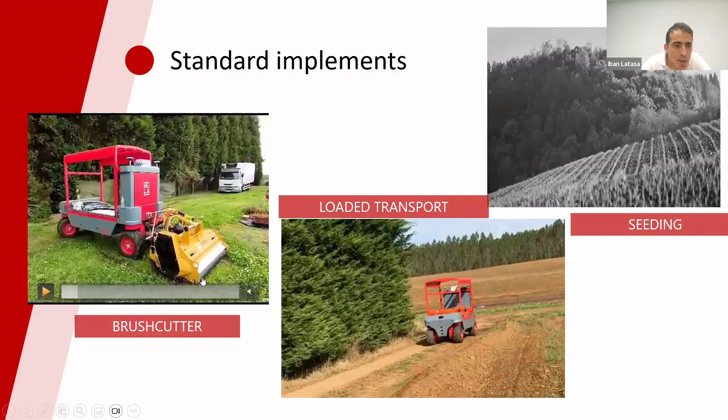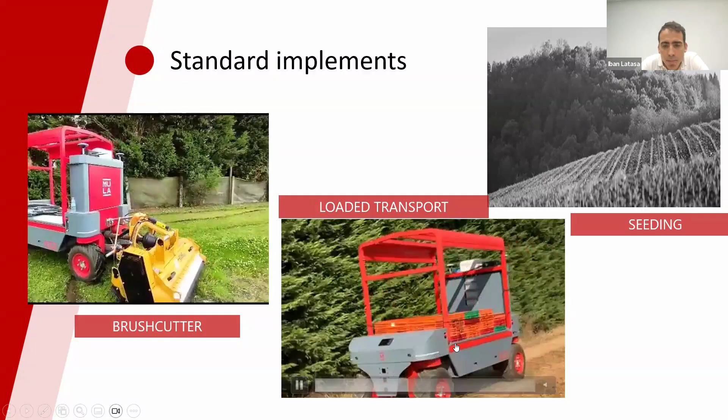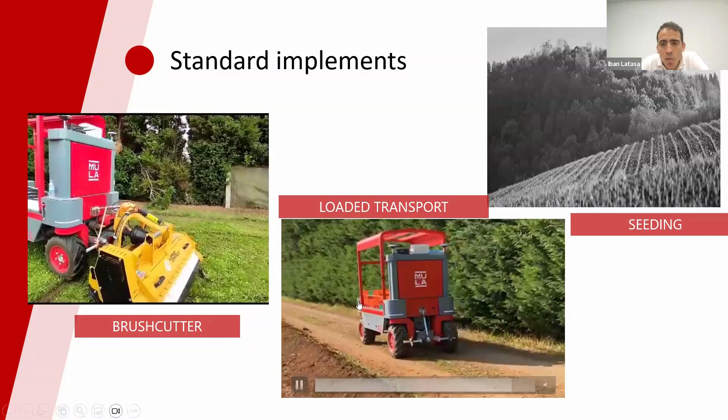It also has a weight system, so you can transport and weigh the results, and monitor anywhere how many kilos MULA has inside. We have also tested it for seed applications.

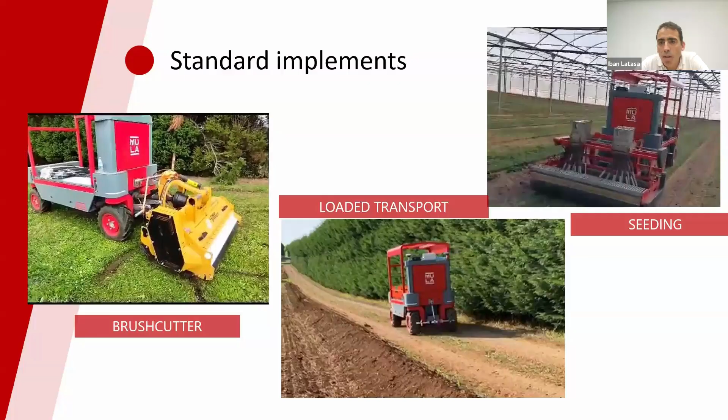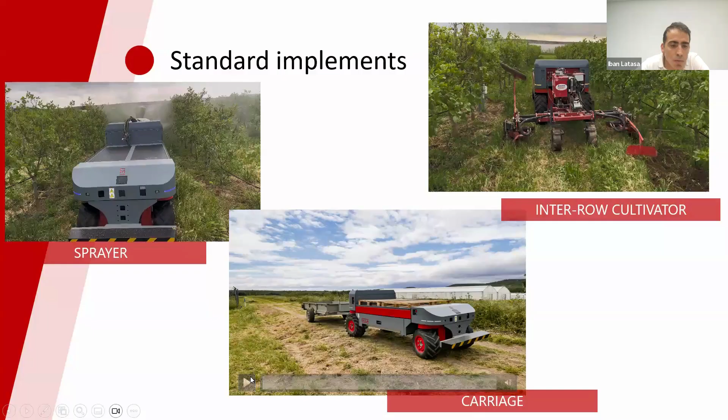Not only outdoors, but also in a greenhouse, and another implement with a sprayer. It goes autonomously, also supporting any work, everywhere in the farm.

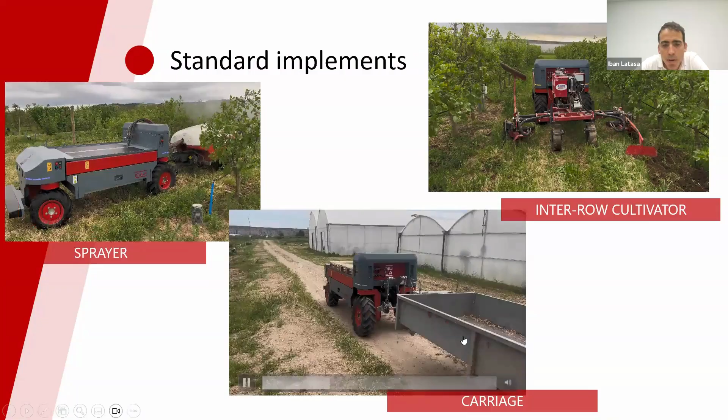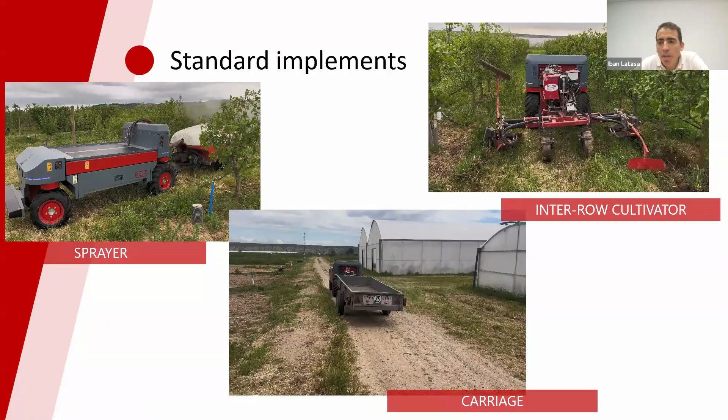So these are standard implements that farmers could already have on their farm, and we can connect them to the MULA.

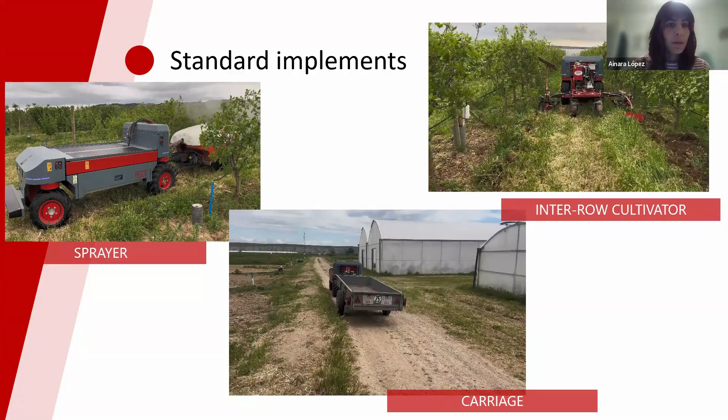Iban, we are experiencing some trouble with the sound. Yeah, I think the sound has finished. Okay, yes, can you hear me now?

Yes, perfect. So as I told before, you can connect any implement that any farmer has. These are smaller implements, not for bigger tractors, but then we will see the dimensions of the MULA and its power.

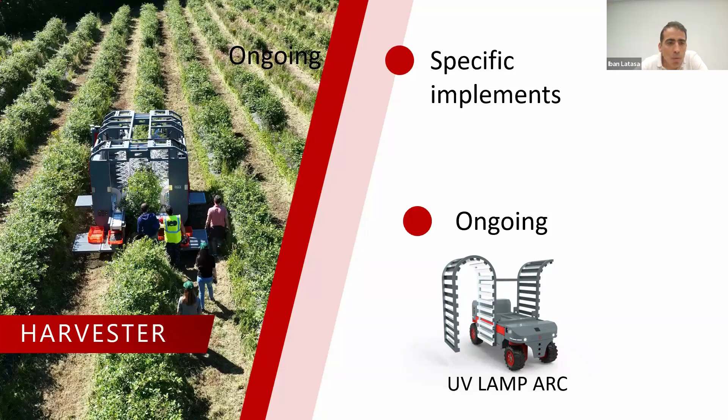We have also developed a harvester that you will see in the first video, because MULA is electric and most harvesters work with diesel, so we have developed a specific implement for MULA.

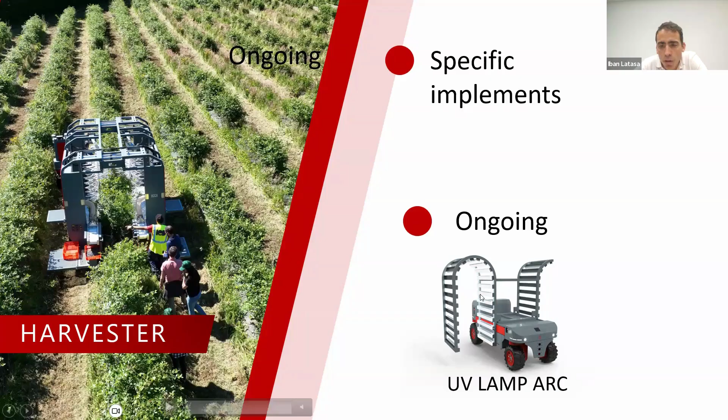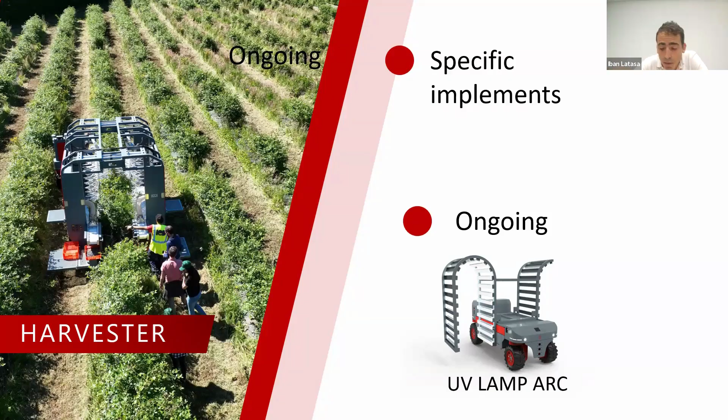Also we have developed, or are developing, UV lamps. Well, I'm not in agriculture, I'm an engineer, so for most cases, to eliminate the chemical parts and use the UV lamps to kill most of the... pathogens, yes, pathogens, that's good.

We are showing here how to manage it from any device. We can manage a lot of MULAs across farms, not only one farm. You can have more than one farm. Each user has his farms, his MULAs, and you can connect them and send a mission.

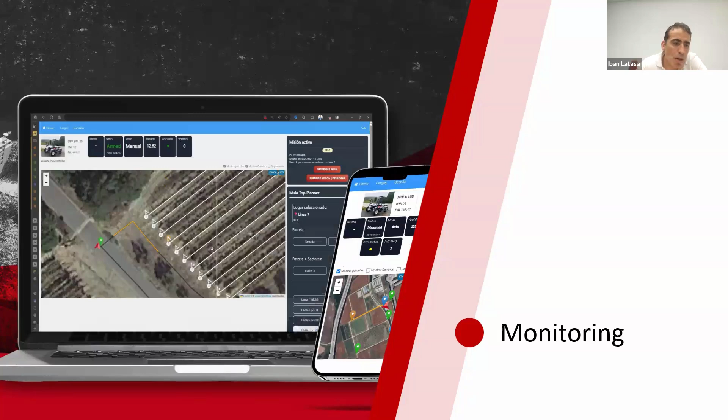You can select the farm, then monitor what the MULA is doing in real time. You can also manage its next mission to do any work on the farm. You can select one sector or one row and assign any agricultural work, and then the MULA will start working autonomously.

So we have designed, we change, you can design... We have designed and manufactured the vehicle, and also the autonomous navigation and the management of MULAs across farms.

That's the electrical part, or the vehicle part. To present the autonomous navigation, I will use a Kahoot. I will run some tests for the audience, and then explain the answers. What are we using in MULA? So if people... I will start.

I don't know why it doesn't start. Sorry. Well, I don't know why it doesn't start. Sorry. But it doesn't start.